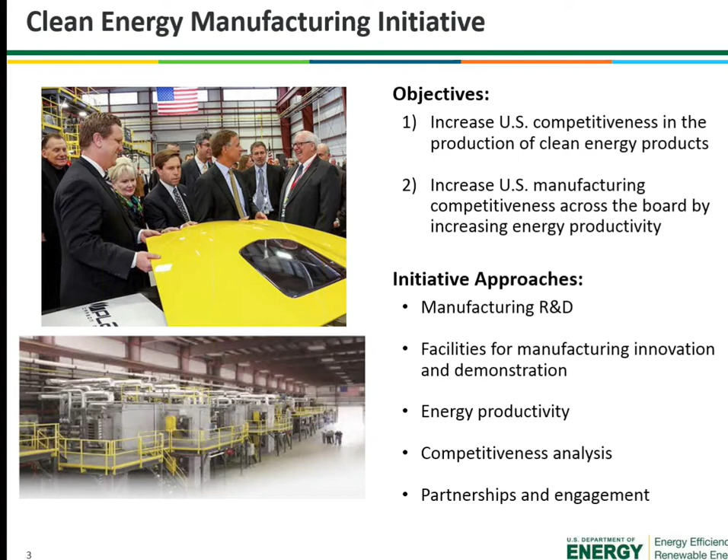We're here today to really discuss one of the most exciting efforts we have focused on advanced manufacturing, on clean energy manufacturing, our new high-performance computing for manufacturing program, also known as HPC for MFG. This effort is led, as Donna said, by Lawrence Livermore National Lab, Oak Ridge National Lab in Tennessee, and Lawrence Berkeley National Lab, with Lawrence Livermore and Lawrence Berkeley both in the Bay Area.

HPC for manufacturing, which was really created by our Advanced Manufacturing Office and my Office of Energy Efficiency and Renewable Energy, or EERE, really couples the entrepreneurial spirit of leading U.S. manufacturers and innovators with the world-class resources and the brilliant minds at our national laboratories to apply the amazing cutting-edge tool of high-performance computing to help them overcome and address some of their greatest manufacturing challenges and opportunities.

And these innovations really hold the potential that we're talking about today to develop exciting, high-impact new manufacturing processes and new materials that can drive American competitiveness in the years and the decades ahead of us. And I wanted to put a little bit of context. Through our Clean Energy Manufacturing Initiative, we've been very active.

EERE and DOE have been a big supporter of the President's National Network for Manufacturing Innovation, where across government we will have established by the end of this administration 15 major manufacturing innovation centers, major regional industry and research institute collaborations in a number of areas.

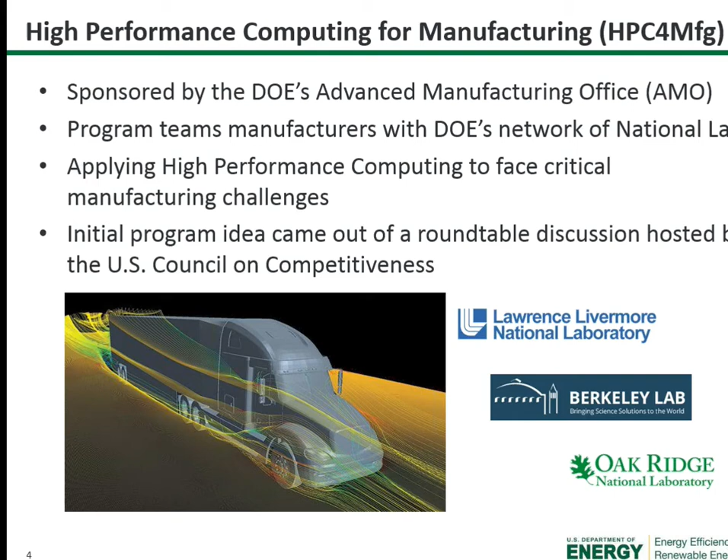And in 2014 was really the nexus of this idea of this high performance computing for manufacturing demonstration facility. And so today is really the result of a lot of great work that's been done in engagement with industry and with the Department of Energy together. We have a list of these awardees that we're announcing today. We're going to be awarding $3 million in a first round of funding to 8 companies who are partnering with us on 10 high-performance computing projects to address their key manufacturing challenges.

These collaborations will apply advanced modeling, simulation, and data analysis to industrial processes and materials to lower production costs and shorten the time it takes to get new products to market. And not only does this program lower the cost of entry for U.S. manufacturers to use modeling and simulation technology for competitive advantage in the USA, but it also paves the way for further energy-efficient manufacturing practices and ongoing development of advanced clean energy technologies.

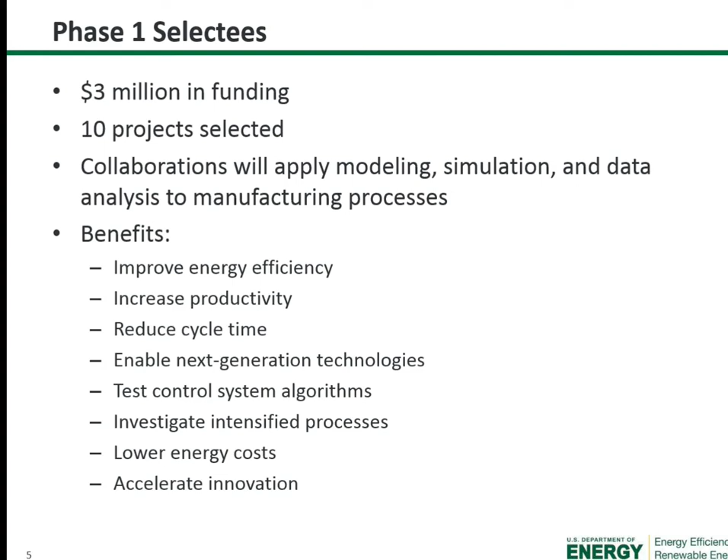And you can see the list. I'm not going to go through all these projects, but I think there's a wide diversity of exciting projects from GlobalFoundries in upstate New York, developing a next-generation microchip that will allow for dramatically lower energy usage. And the high-performance computing will be used to model the electron flow and the heat generation at an unprecedented scale

to help them design that technology, all the way to a small business called ZoomEssence in Kentucky, who's going to use high-performance computing and advanced computational fluid dynamics to model a completely new way of drying food, which is a huge energy user in this country. And so that game-changing new technology can dramatically reduce the energy footprint of our food industry. And that's just a couple of those projects. You can see here that overview.

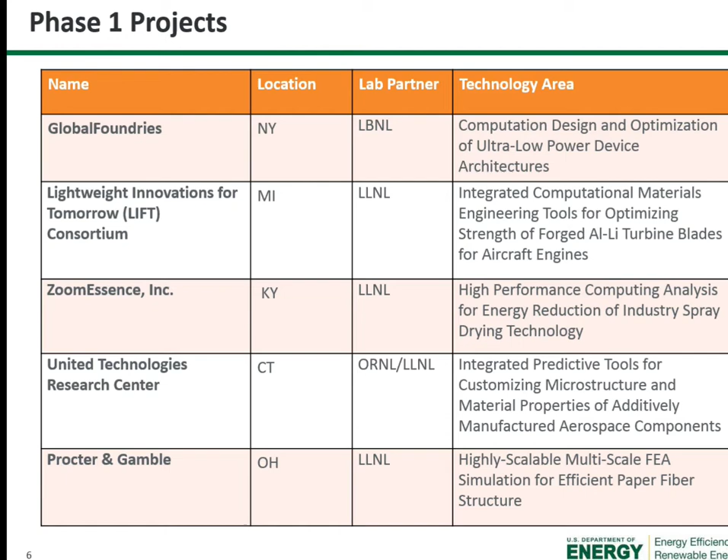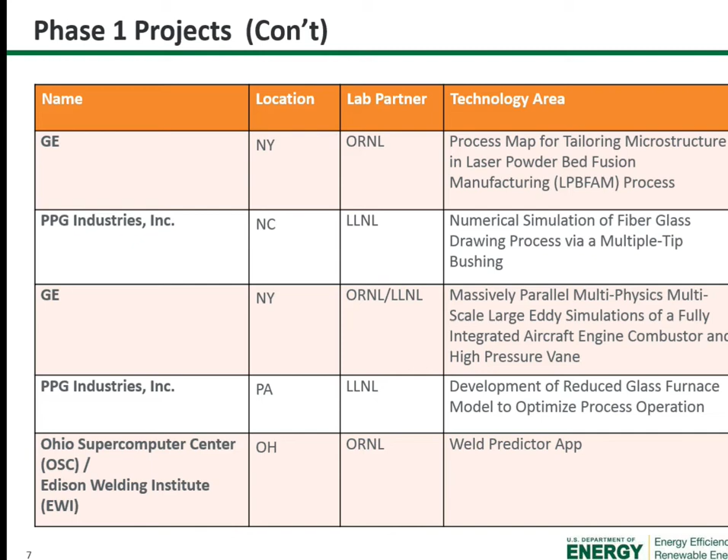But I did want to just hit on a couple of specific projects very briefly. The first is a project we have at GE Aviation. General Electric in this project is partnering with Oak Ridge National Lab and Livermore to improve the efficiency and component life of aircraft engines through design optimization and the application of high-performance computing and computational fluid dynamics to really understand how these gases and reactions flow and design a next-gen, much more efficient jet engine.

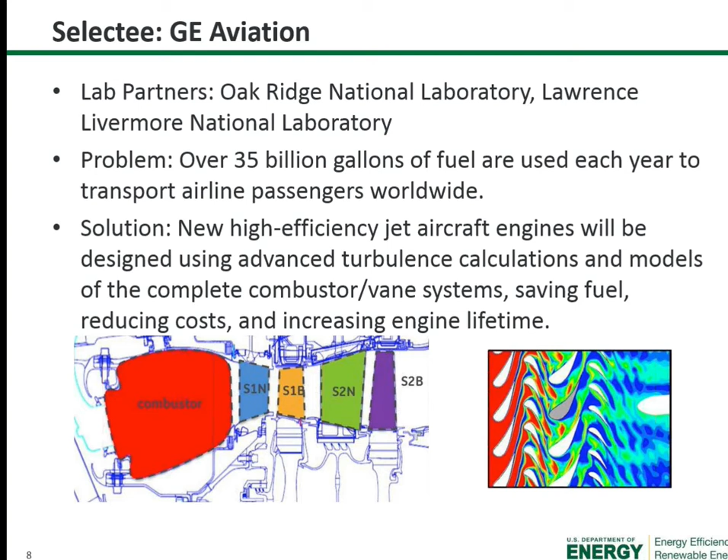More than 35 billion gallons of fuel are used each year to transport airline passengers all around the world. And this initiative really holds the potential of helping to reduce that fuel usage dramatically, reducing costs, increasing engine lifetime and reducing emissions. The other project I wanted to mention is a project we have with Procter & Gamble. This is an example where Procter & Gamble is going to be working with Lawrence Livermore National Lab on an area that maybe you don't always think of when you think of energy, but the pulp and paper industry is one of the biggest energy users in the country.

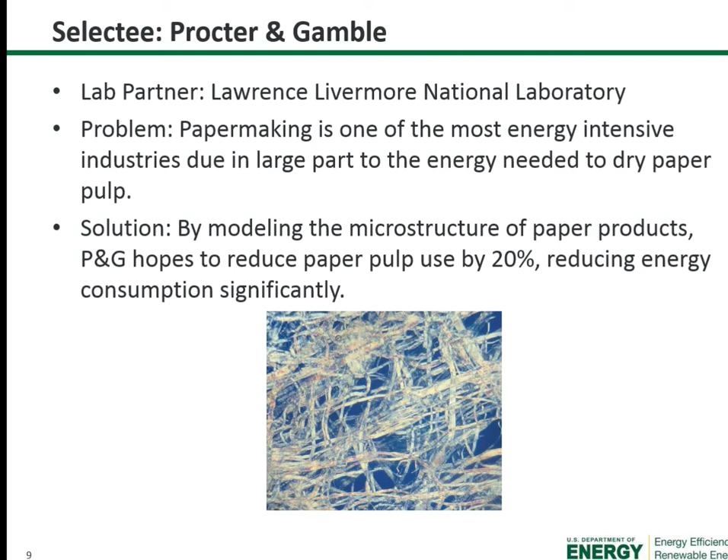And this project will use high-performance computing and modeling of paper and paper manufacturing processes to reduce the amount of high-energy pulp that actually goes into this paper by up to 20%, which can dramatically reduce the energy that's going into this industry and save companies like Procter & Gamble a whole bunch of money in the process and reduce costs to customers. These are just a couple of examples of the exciting work that we wanted to highlight to you that's happening through this initiative and this first major announcement related to this new HPC for manufacturing program.

President Obama and other world leaders recently committed to doubling down our investments in clean energy R&D over the next 5 years through the Mission Innovation Initiative. It's clear that solving our climate and energy challenges will require technological innovation, including the development of some technologies that we haven't even come up with yet. Partnerships like HPC for MFG are what will allow us to develop the breakthrough technologies that we need to stay globally competitive in the race for new and innovative sources of energy. And we're just getting started.

Over the next few months, we will be announcing a second round of funding of $3 million available through the HPC manufacturing program to qualified industry partners to participate and compete for.

I really want to emphasize that high-performance computing is truly a competitive advantage for the United States, and it's not just what our national lab partners call the big iron, the big computers, but it's these big brains and these amazing and talented people we have in our labs who can actually help advanced companies use these facilities in a way that can really drive their competitiveness and drive their ability to develop new products in the clean energy sector.

So with that, I'm going to turn over the call to my friend and colleague, Dr. Mark Johnson, the director of our Advanced Manufacturing Office, which is the sponsoring office for this exciting new program. And Mark's going to discuss his team's work on this initiative and some success stories that we've already had from our first crop of program participants, where we made some seedling investments even in advance of this exciting first major call for funding and the $3 million and 10 projects we're announcing today. With that, let me pass it over to you, Mark.

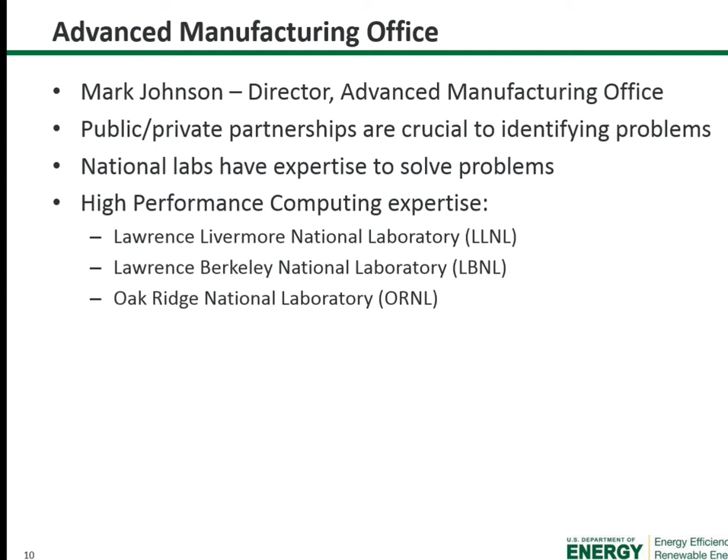So Lawrence Livermore National Lab, Lawrence Berkeley National Lab, and Oak Ridge National Lab all have world-class technical capabilities and expertise to solve these complex problems that the industry is facing, and linking that up together with the high-performance computing was the effort we went through over the past year. Just to give you a little bit of background on the piloting of this, we had 4 seedling projects that we went through over this past year just to be able to demonstrate the range of capabilities that are possible in this area. The 4 projects are listed here.

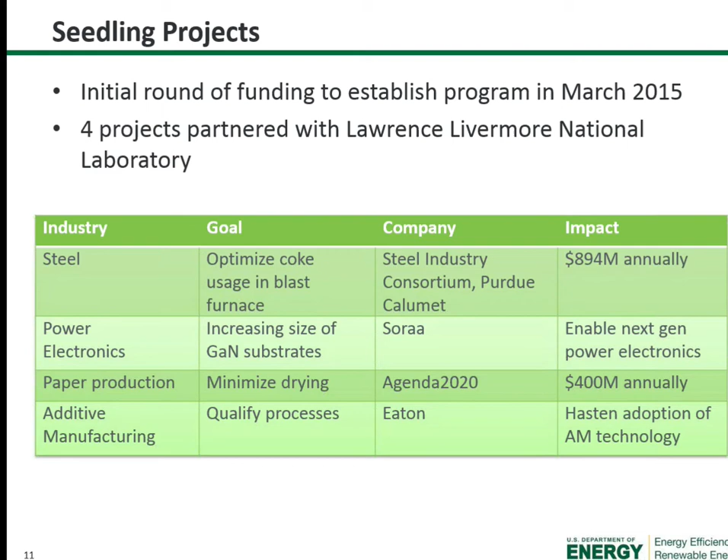Just to give you an example of a few of them, if you look in the steel industry, for instance, in making a lot of our steel, we still use steel-making processes like blast furnaces, and how you use energy in those processes really affects the outcome in how you wind up making that steel. So Purdue Calumet leads a consortium of steel manufacturers, and we worked with them to receive funding during the seedling round to use high-performance computing to optimize the blast furnace processes.

A high-quality blast furnace computational model really has the potential to save money in how they operate the blast furnace and also improve the productivity of that blast furnace operation, getting greater technical understanding of the operation. There are still 20 blast furnaces in the United States, and these new techniques may help steelmakers more rapidly adjust production to fluctuating market conditions, and can potentially allow the factories to run more efficiently at a wider range of operating conditions. That both improves the energy efficiency and, as importantly, helps protect and save American jobs.

So, for instance, at U.S. Steel number 14, which is one of those blast furnaces, for every percentage point we shave off the coke rate in a blast furnace, we reduce the total coke consumption and the carbon footprint by 8.5 million kilograms per year. This is based on Steel Association's estimates on these numbers. But that's a huge potential impact on both improving the energy efficiency, reducing the carbon consumption, and also really driving economic efficiency of these processes.

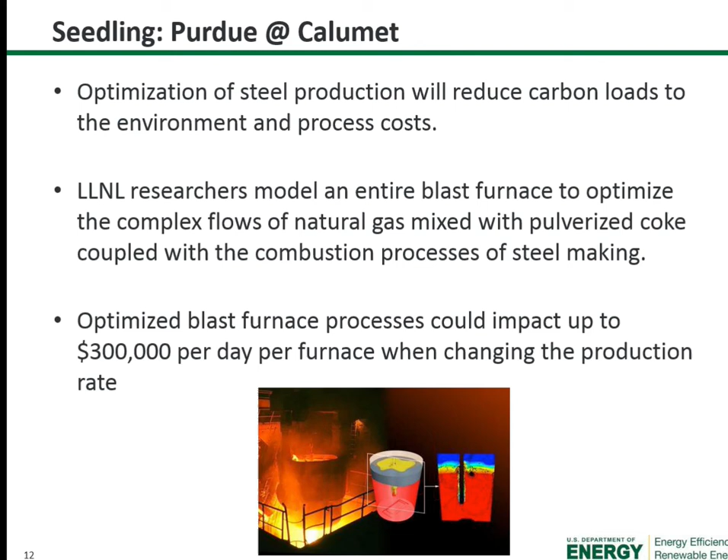On the other end, as Dave said, the paper manufacturing area is still a large energy consumer in the United States. There's a group called Agenda 2020 that runs a paper manufacturing consortium. They're using HPC to model how water flows through the pores of paper during the pulp and paper process and during the pressing process. This is a very energy-intensive part of that process.

And there's a specific area of that called the re-wetting process of pulp and paper during the pressing that's the most energy-intensive part of the paper-making industry. And developing a really high-resolution computational model of this allows optimization of that process and could potentially save the paper industry up to about $240 to $400 million annually. So this really can have impact in a lot of these energy-intensive industries.

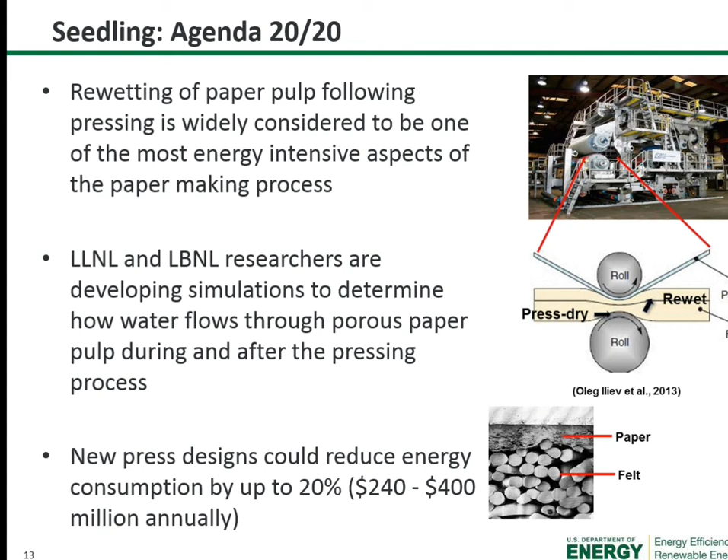Now going to some of the more emerging technologies that are out there, we work with a company called Soraa. It's a startup company that is one of our first seedlings, and they work with Lawrence Livermore National Lab. Soraa develops high-fidelity models for the manufacturing of the materials that are used for the very high-efficiency LED lighting that's coming out right now, trying to eliminate the trial and error approaches in the experimentation of the manufacturing, and having really strong predictive models for how they can scale to even larger sizes, driving down the cost in those areas.

With that, I'd like to transition over to Mark D'Evelyn from Soraa, who's joined us today to go into some of the impact of this project on his company.

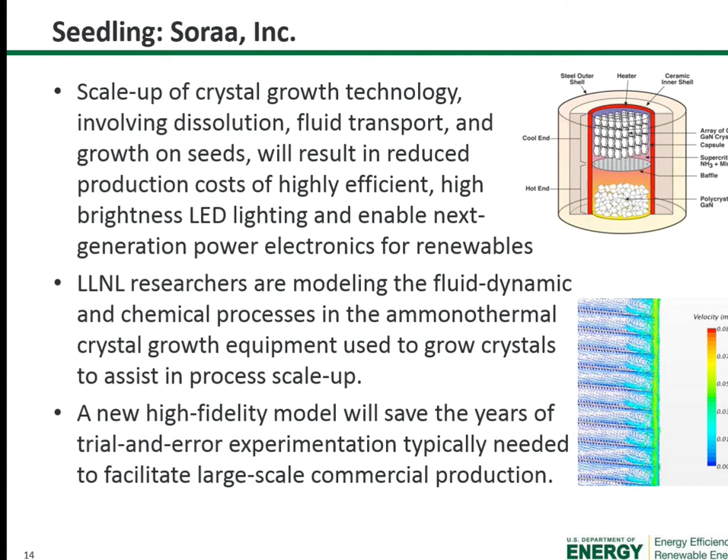Thanks, Mark. Soraa is a solid-state lighting company manufacturing a range of LED-based products such as MR16 lamps, which are shown on the next slide. Like LEDs manufactured by our competitors, Soraa's LEDs are based on a semiconductor material called gallium nitride, or GaN for short. Unlike our competitors, however, our LEDs are fabricated on native gallium nitride substrates rather than foreign substrates such as sapphire. Our founders, led by Nobel Prize-winning professor Shuji Nakamura, became convinced some years ago that the use of native GaN substrates would be the key to unlocking greater performance from GaN-based LEDs.

Today, Soraa's GaN-on-GaN LEDs emit 5 times the light per unit area as other LEDs, with unique full-spectrum color, enabling excellent rendition of all colors from whites and violets to deep reds. However, the GaN substrates we purchase overseas today, developed originally for Blu-ray laser diodes, are rather expensive, and their crystal quality is not yet as high as better developed materials such as silicon.

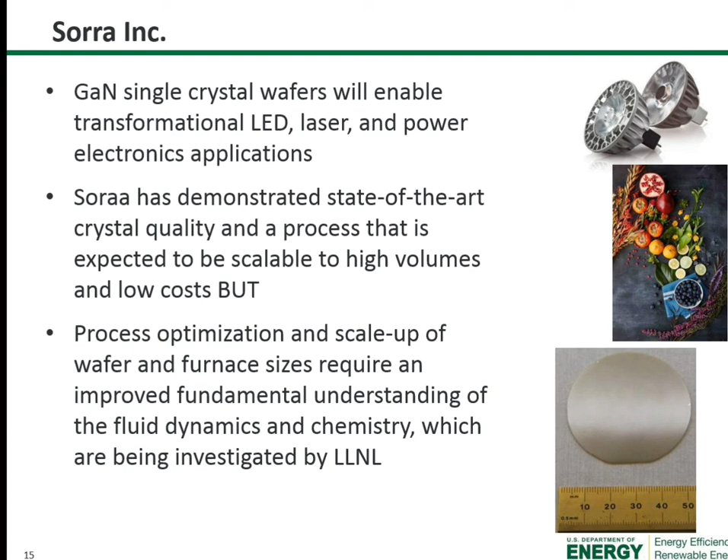In order for this to happen, however, we need to better understand and control the fluid dynamics within the crystal growth environment. This process operates at high pressures and temperatures, so it's not practical to observe the crystal growth process directly. Therefore, we're delighted that the DOE has funded Lawrence Livermore to develop an advanced model for the fluid dynamics and chemistry that take place in this process. If they're successful, this will greatly accelerate optimization and scale-up, and we hope enable large-scale US-based manufacturing of GaN substrates, as well as of advanced LEDs, lasers, and next-generation GaN-based power electronics.